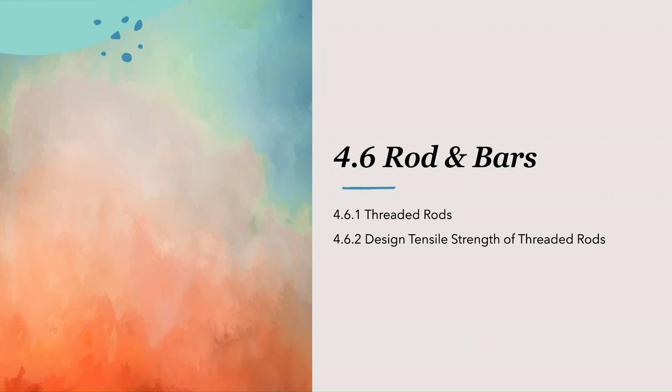Till now, we have discussed a lot about design tensile strengths of wide flange, channels, angles, and built-up sections. Let us now look at rods and bars. The basic difference between a rod and a bar is that a rod is always circular in shape, while a bar can be rectangular, square, or circular in shape. You can say that a circular bar is also called a rod. Well, we will discuss two topics here. First, we will learn what are threaded rods and discuss how to calculate the design tensile strength of threaded rods. So let's begin.

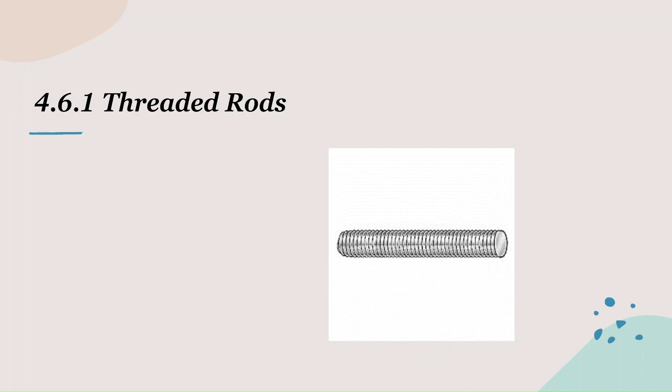Threaded rods. You might have seen this before. It has a circular cross section and has protrusions or threads on the rod. This is a threaded rod. It is mainly used in bolts in this manner. Here you can observe the threaded rod. Let us go over some terminologies for a threaded rod.

This part of the bolt where there are no threads present is called a shank, and the part of the bolt where threads are present is called a thread or a thread runout. As you can see, the shorter bolt does not have a shank, so a bolt can come with or without a shank. I hope these two terms are clear.

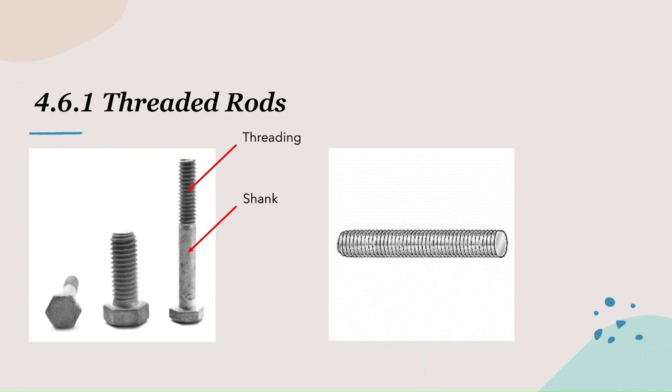Let us discuss more about threaded rods. This is a magnification of the threads. You can see different terms labeled here. Let us discuss them one by one. This is the surface of the thread, which is magnified even more. Well, let us start with pitch or P as shown in both the figures. Pitch is the horizontal distance between the adjacent threads.

Next is thread angle. It is the angle subtended by two inclined surfaces of two adjacent threads. As you can see in the figure on your right, the thread angle in this case is 60 degrees. Next is the root of the thread. As you can see in the figure, the root is the inner part of the thread, or you can say that it is a trough of a thread.

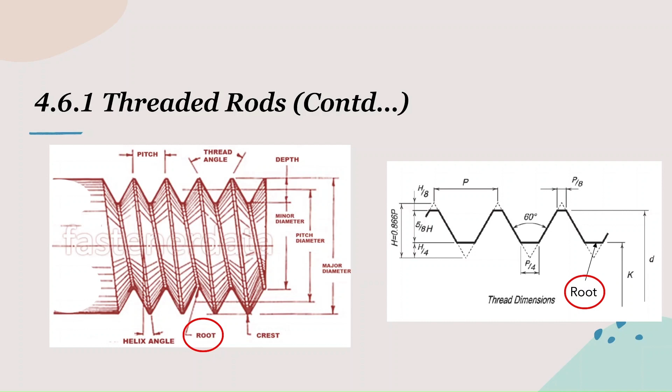Roots are present on both the sides of the rod, and the vertical distance between the two roots of a thread is called a minor diameter or minimum root of the thread, denoted by an uppercase K. As shown, AISC uses the term minimum root and not minor diameter.

The outermost part of the thread is called the crest of the thread. Think of it as a crest of a wave, as crest is the uppermost part or the peak of the wave. In the similar manner, crest is the outermost part or the peak of a thread, as shown in these figures here. And the vertical distance between the two crests is called the major diameter or the major thread diameter.

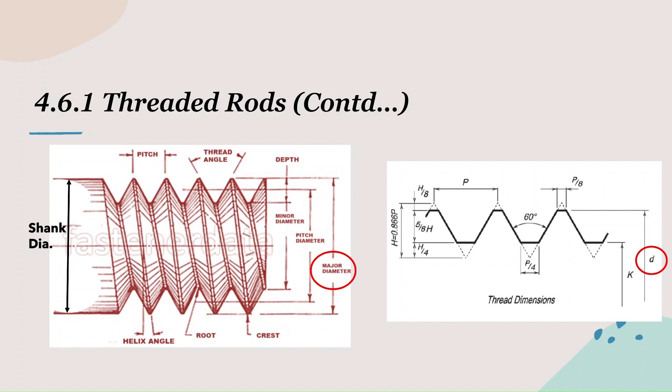Next is the minimum root area. This is nothing but the circular cross-section area considering the minimum root distance as the diameter. As in the gross bolt area, we use the bolt diameter D. Here, we use the minimum root distance K to compute the area. As you can see, the minimum root distance is smaller than the bolt diameter. Hence, the minimum root area is also smaller than the gross area of the bolt.

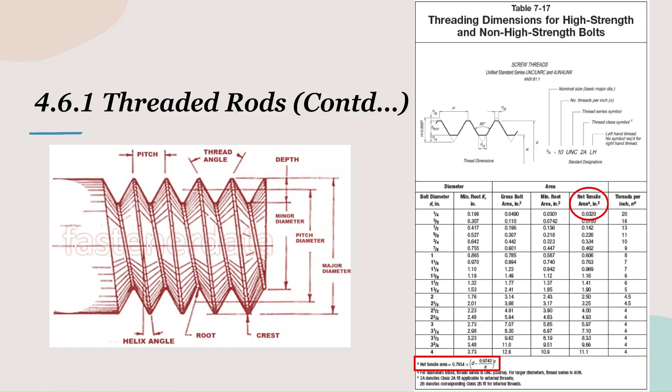Design tensile strength of rods. Now that we are aware of the terminologies associated with threaded rods and how to fetch thread dimensions from AISC manual, the next step is to learn how to compute the design tensile strength of rods. As we have learned, the design tensile strength for any element is the tensile stress in steel times the cross-sectional area. Well, the nominal tensile stress of bolt has a slight modification. According to AISC J3.7, which I will attach as a reference to this lecture, the nominal tensile stress of the bolt is equal to 75% of the ultimate tensile stress of steel.

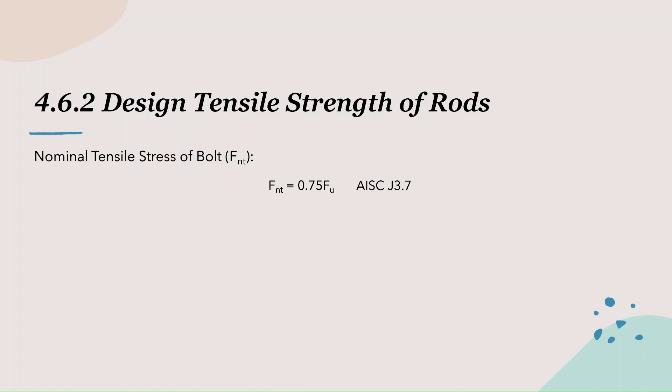So, for example, if the bolt is made from A36 steel that has an ultimate tensile stress of 58 ksi, the nominal tensile stress the bolt can carry is only 75% of 58 ksi, that is 43.5 ksi. I hope it's clear. Next, to calculate the bolt tensile strength, we need its area. As we know, the circular cross-sectional area is just pi d squared over 4. D is the bolt diameter. It is calculated as a diameter of shank for the bolt, which means the diameter of the unthreaded part of the bolt.

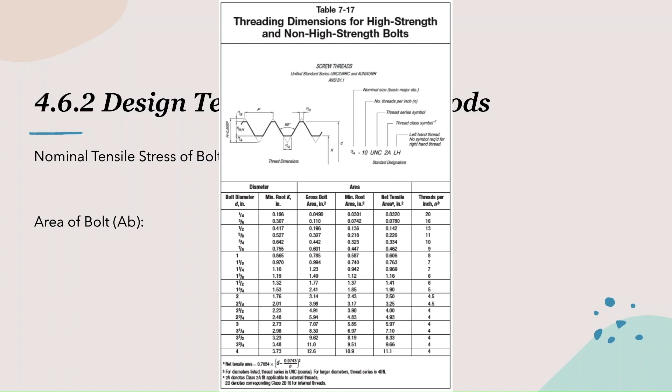AISC table 7-17 gives us the bolt area of various standard available bolts. I am referring to the 2022 version of the AISC 360, released recently. Now that we have the nominal tensile stress and the bolt area, we can calculate the nominal tensile strength of the bolt. It is the nominal tensile stress of the bolt discussed earlier times the bolt area, or the gross bolt area Ab. Design tensile strength is the nominal tensile strength times the resistance factor. Resistance factor to use here is 0.75. I hope it is clear.

We will use what we have learned here to solve an example in the next video.